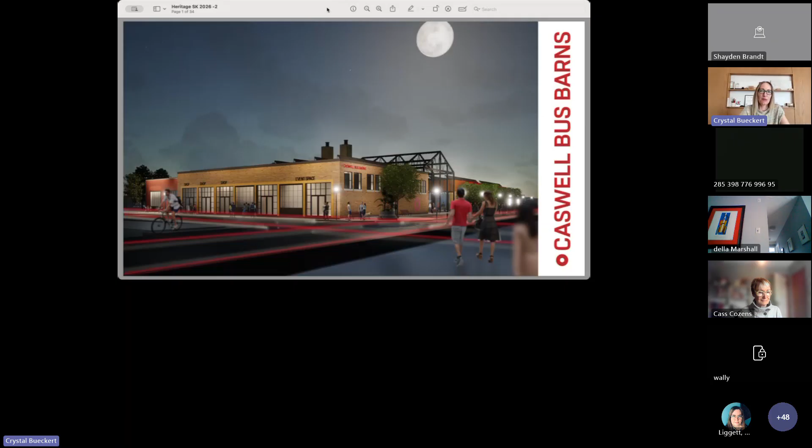So I'm going to tell you everything Krista explained and we'll go through the journey of our process. I am Crystal Bueckert of Bldg Studio Inc. I am trained as an architectural technologist and a registered interior designer, and I also have my fine arts degree from the University of Saskatchewan.

So I'm sort of an organically grown designer, I guess. And I live in the Caswell Hill neighborhood. Our office, as seen here on the screen, is also in the Caswell Hill neighborhood, actually across the street from the Bus Barns. This was one of our smaller adaptive reuse projects—our office is the old convenience store from 1923. We've redone it and it's home now.

Partway through our journey as Bldg Studio Inc., one of my employees, Kyle, and myself decided we would start developing. Our first project, we chose the hardest project in Saskatoon, the Caswell Bus Barns, to break our teeth on. We named it Prologue, because a prologue is the opening, the page before the play happens. So we feel like as developers, we're the introduction and we set the stage, and then the user can come in and write the story.

So our content today—some of the things I'm going to go over: a bit of history of the project, which is very varied; our objectives in the design-build process, as a community adaptive reuse process; the vision, and how that translated into our design principles, and then how that translated into actual construction and reality and the challenges we faced after that. And then I'm going to show you some before and after pictures of the project. It's almost done, so they're not exactly after pictures at this time.

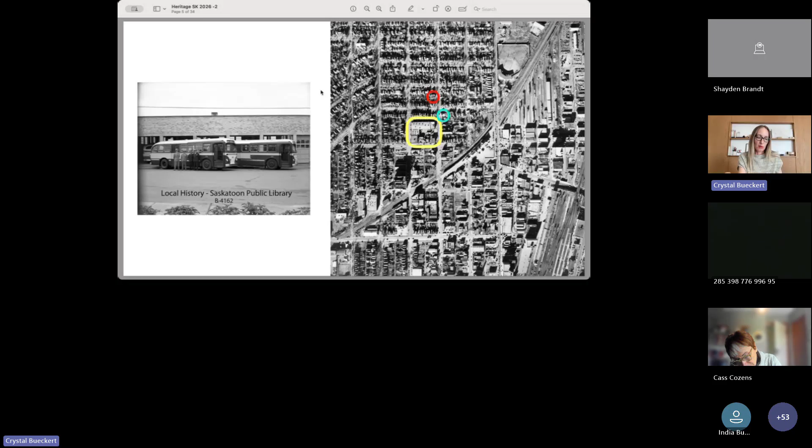So having the original drawings has been amazing. This is a drawing from the 1948 building, which they built when they got the gasoline buses - up until that, it had been streetcars in the neighborhood. So this was a major build for them. It's a beautiful building, so lovely to have these hand-drawn drawings, including the full schematics for the structure, the poured-in-place concrete, the posts and the roof. It's a very sturdy building, and it would have been an absolute shame if this thing had been knocked down.

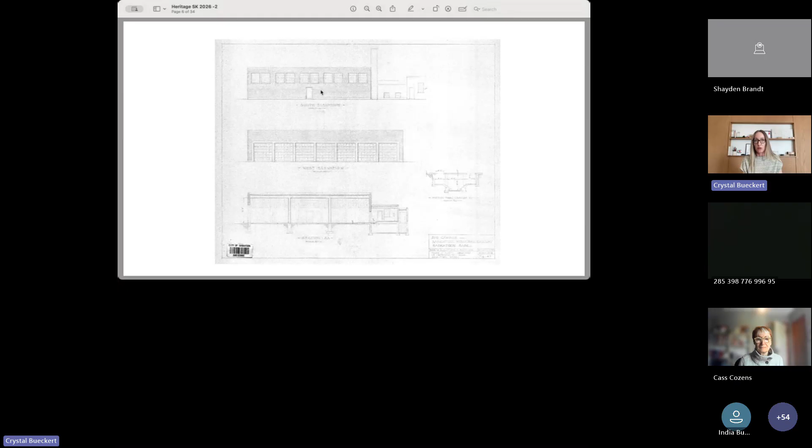Connected to it is the 1974 building. Here's the whole floor plan of the 43,000 square foot building we're dealing with. We figure it's about 5 buildings put together, with various ramps connecting the different parts due to the slope of the site. So this is kind of what we were dealing with, and what we started with when we began our drawings was actually this document. It's been really helpful to have this.

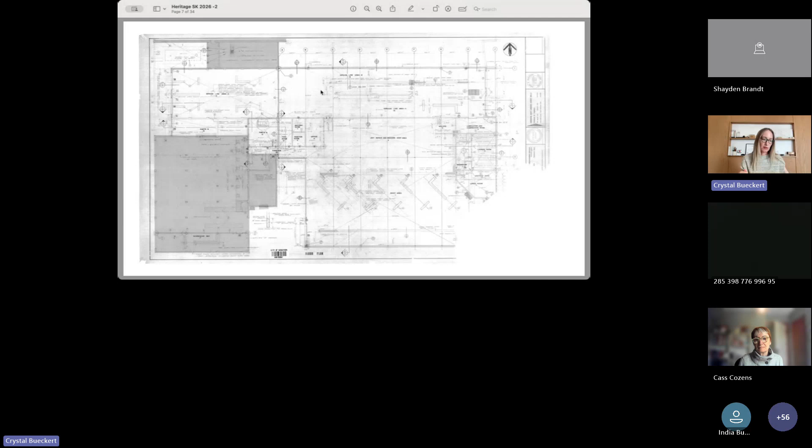The city planned to move the buses out of the neighborhood somewhere around 2009. They knew they owed the neighborhood something better because it had been so awful for so long. Living a block away, there were about 200 buses driving past my house 4 times a night, every night, as they circled around to go from one end of the garage doors to the other. So the neighborhood really took a beating on this one.

So the city knew to collaborate with the community, got the community association involved, and did a full concept plan - the South Caswell concept plan - proposing what we actually wanted in our neighborhood. We had design charrettes, everything. This was all back in 2010, so this has been a long-running project. It's really important that the community was involved and has been involved the whole time, as they've really driven this adaptive reuse and turning it into a mixed-use building that will benefit the neighborhood.

So in 2020, there were quite a few proposals, other developers who tried purchasing these buildings and having various different kinds of plans and planning. And then the last one fell through when COVID happened. So after and during that time, the city had already remediated the property because they knew they couldn't sell the building.

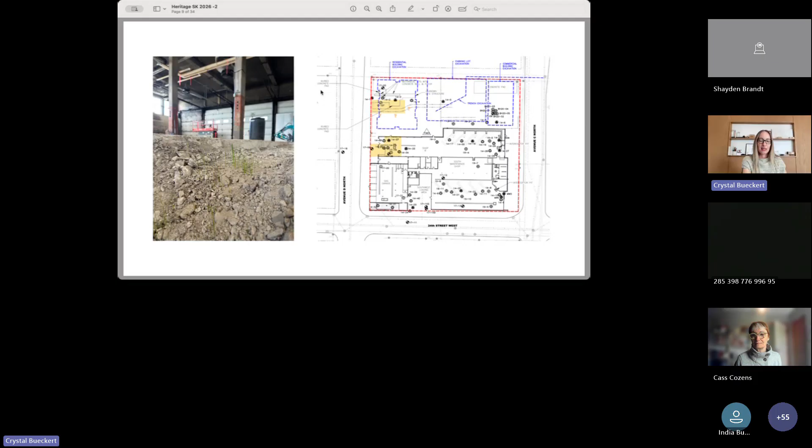So our project objectives are pretty much straight out of Jane Jacobs' book for adaptive reuse and mixed use. We wanted to revitalize the building, obviously. It's got such good bones, we needed to use it. We wanted to create diverse artistic experiences in the building, as the community had asked for an arts and culture hub. And with that, having the community engagement, making this a building that the community can be proud of and be involved with, and therefore have the economic growth.

So in rejuvenating this existing building, it's serving as an arts and culture hub, and we're breathing new life into the area and becoming a cultural anchor point for the community. It is at the southern end of the community, but it's sort of on the way to downtown, so it kind of does feel like a collecting point.

As an arts and culture hub, and knowing that artists would inhabit this building along with nonprofits and cultural organizations, we knew that artists can do anything with any building. They're often the first group in a space, in an older adaptive reuse building, who come in and make it better because they have a vision. They're so creative. They can do anything with any amount of money. And they're usually the ones that make it great and make it safe and bring that community in.

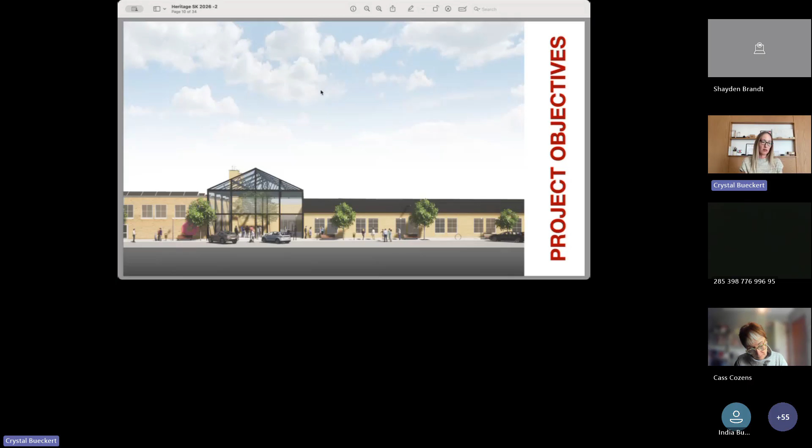So this was the main objective that the community wanted us to do, and this was part of the South Caswell concept plan back in 2009, 2010. Right off the hop, it was adaptive reuse of the buildings. They see that corner yellow brick building, the 1913 building, as the heritage site, non-designated of course, so keeping that building was very important to them. They wanted to maintain all of the other buildings as well, with structural considerations in mind. Once the structural engineer was through, all these buildings on our north portion are totally stable and very good buildings.

So this was sort of their list that came out: do commercial, do arts, do mixed use, reuse the buildings, and have it as a community center. So far as to say retail, daycare, art studios, artisans, food producers, and a market area. I'm hoping the things we're not taking care of in this list can get taken care of in the south portion when that goes for sale.

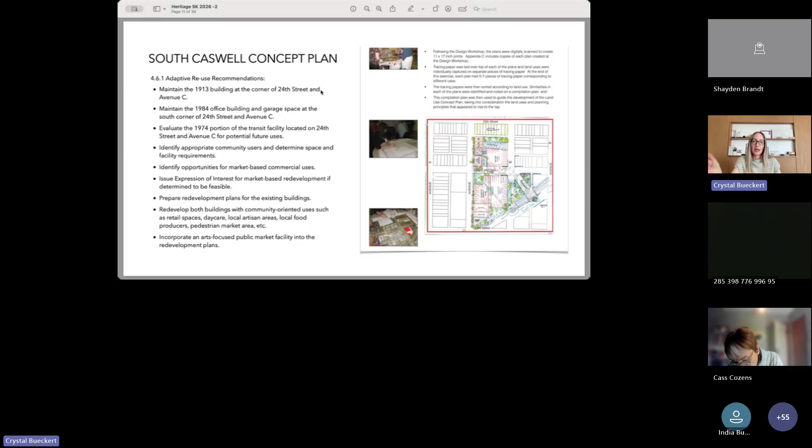Yeah, a very artistic neighborhood, and I think they really nailed it with this one. Just over on the right here is a snippet from the report, and that's me in the middle photo back in 2009 drawing a site plan for this space. It's been a passion project, and I'm really happy to be part of the group to take this forward. The community design charrette was amazing, everyone showed up, we still talk about it. I think it's just a really good mechanism to get the community involved and get all those ideas out, and this one worked - it's actually happening. Very happy to be part of that.

So those are our objectives and our history, and then we have our vision that we're going to lay on top of that. With that in mind, we know we have to deal with various artistic experiences and disciplines. We need a place for culture to happen, for community to happen, for those accidental interactions between groups where there's a synergy and the different groups can start working together. We needed to know we had to create the places for all of these things to happen, but also not being prescriptive with it.

Not building a space and being like, okay, well that's where you take your phone call, or that's over here is where you do this. So knowing that this community can take care of themselves and they can build this out how they see it happening, we're trying to be minimal on our side so that it's a grassroots and organic development. It may not be the fancy door-opening that people want to see on the first day of a project, because this thing does need to grow and develop on its own. But I think that's where the success is going to happen - in what happens in the years to come.

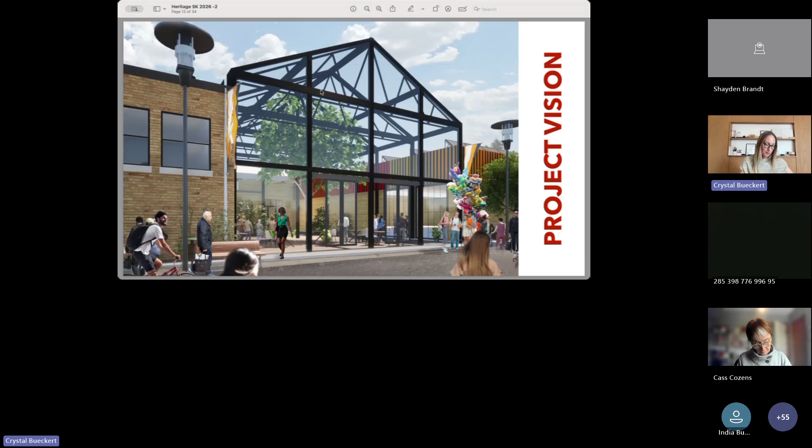So this is the site. The lower middle is the 1947 and 48 original yellow brick buildings from one of those first photos, so the community is calling this the Heritage Building. It's connected to a 1921 portion of the building, which we only found out recently - we thought it was a 1949 building, but things have revealed themselves. That's connected to the 1974 and 75 buildings, the metal structure, concrete block, very 70s building with clear span trusses. What we're doing is connecting that empty space between them with a public atrium - a very clear gathering space, and it faces south, so it's going to be very beautiful, well lit. This will be the main doors into the building, so it's going to connect the thing as a whole.

So after we're about to wrap up this building, the next parcel and phase 2 is the 2026 start of the apartment buildings, which is a 28-unit apartment building, affordable, and there's 9 barrier-free units on the main floor, which is also something that's hard to find in our neighborhood. So we're excited about that.

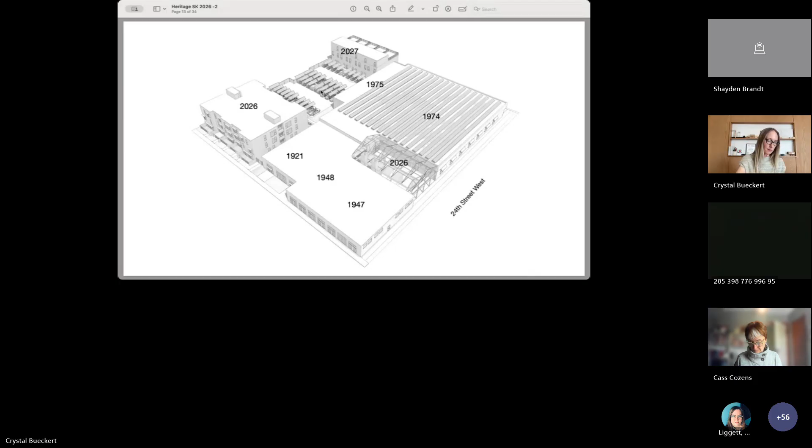It took us probably 3 years to get all the right people in the building. We had many conversations with all kinds of groups, sort of a revolving door at some points, just to make sure that we were creating good roommates and a community that we knew would work well together. So it was a lot of talking. A lot of people wanted to but couldn't. But I think we got to where we needed to get to.

So the community theater is our anchor tenant, and that is Summer Players, GTNT, Gordon Tootoosis Theater, and On the Boards coming together. And we have a printmaking studio next to that, a ceramic studio next to that, a learning center for adult learning, artist studios, sound recording studios, a gallery space, architecture office, and a retail.

Pardon me, I'm not used to talking this much. And then you can see the public atrium in the middle of the space, and that's our center focal point. So it's very important to the whole building. Again, the doors are coming in from the bottom.

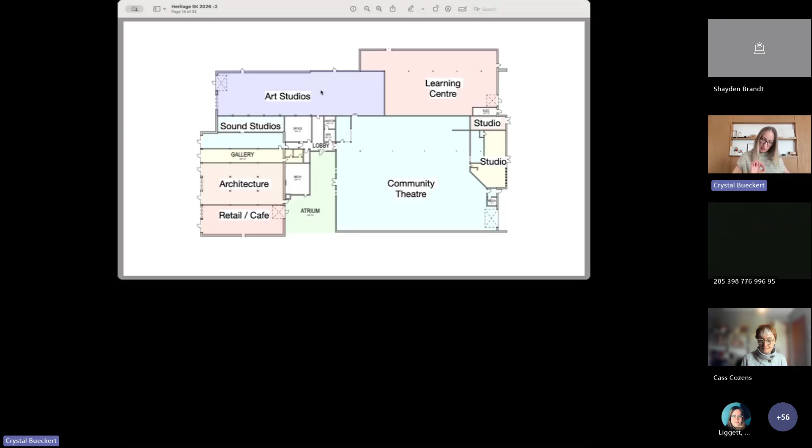So to explain this, one thing is showing a floor plan, but to explain our vision to these people who are coming into this dirty building when we first got it, we made these vision boards, and these are really important to communicate to everybody how the space is going to feel and how you can take an industrial building and adaptively reuse it into these functions.

So on the left, we have just some general vibe of the building and how the atrium can look and the overhead doors. And then on the right, we have the theater space, which has really high requirements for theater space. And so a big box is the best place to start.

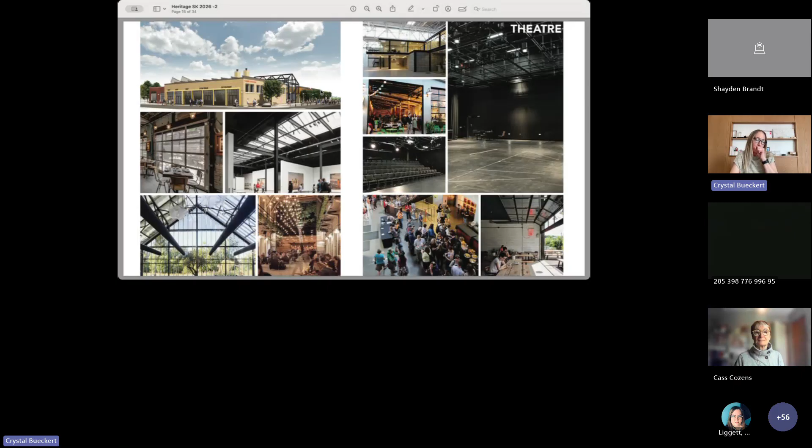The office spaces and studio spaces, again using that sort of raw space, easy for people to understand and for arts organizations to understand. And pottery, gallery—excuse me—and just using that natural light and those natural elements of the concrete and the metal structure.

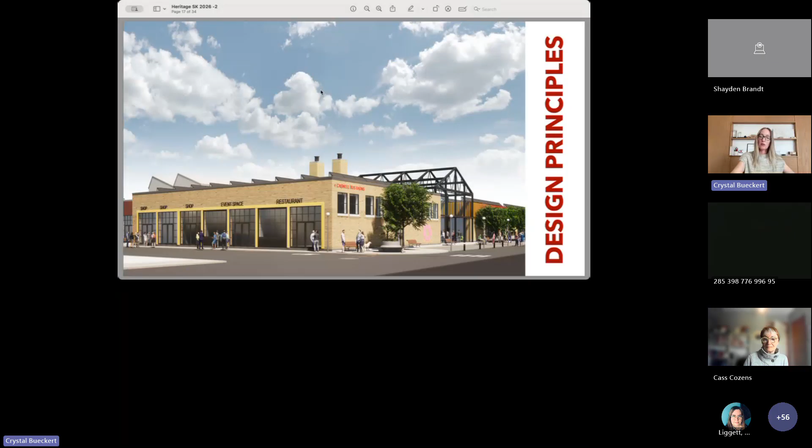Design principles. So the adaptive reuse mixed use project, we're aiming to thrive through artistic expression and community involvement and engagement. And with that, sustainability with the project and inclusivity, so that we can make this culture grow and have economic growth in our area.

So with our design principles, and you get a building like this, it's very important to use what you've got. And there's so many things in this space—the writing that people have done on the walls, the old paint colors, various signage, quite interesting. The Estevan bricks there in the middle picture with the caulking as a pointing solution. So a lot of surprises along the way.

And then on the right, just how all these old buildings were put together, and the roof leaders just running through the space, sprinklers everywhere, lots of mechanical and electrical solutions sort of done ad hoc. So dealing with these things, we knew we had to be flexible and maybe not too precious about how we were going to deal with some of these problems, and to celebrate them—celebrate the historical significance, the architectural significance of these buildings, and really showcase what they are.

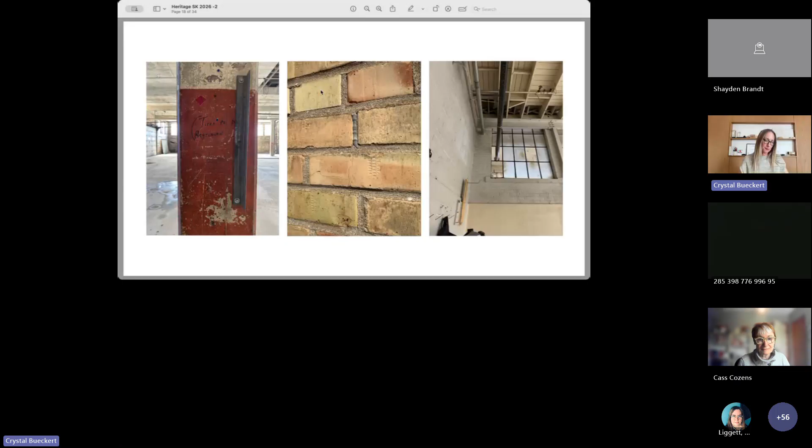So this is the difference between the 1974 and the 1948 finishes, and how we needed to sort of blend them together, but also reference each other. And then how do we add the new brick? We found a pretty good match with a Hebron brick that was very close—it just needs like 40 years of diesel fumes on it to match. So having these together and knowing we had to be flexible in all of this usage, and reusing the signage as well.

So fixing the building is one thing, and then making it look good was the next thing. So we wanted to create some simple spaces visually and not put too much into it, by incorporating the story and life of the building and telling its narrative. So we wanted to unmask the materials and not cover them up, to make reference to them and celebrate their history. That means keeping things simple at the start, and leaving room for it to grow and be flexible, and not over-prescribe what our design is going to be, so everyone can make it their own.

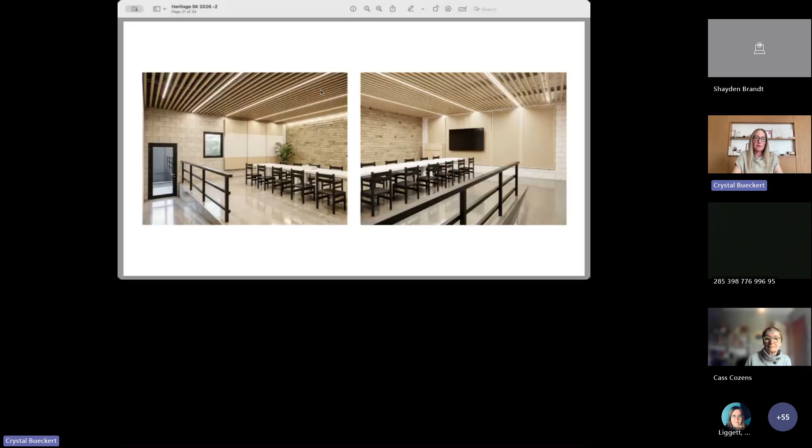This will be the community room. So we have one space available for rentals from the community. We're just polishing the floors and revealing the brick and adding some wood for warmth and something a little bit more human in the space, but a very simple reuse.

It's going to be used for meetings and workshops, etc.

We had many designs for these buildings. We knew we wanted the whole development to sort of look like a whole, but I tried red brick and different colors of the siding.

And I actually did a poll with our Instagram followers with all the various materials that could be possible for these buildings. And the community basically unanimously spoke that they wanted it to stay the same as the original buildings and to create that heritage feeling. So they chose these two.

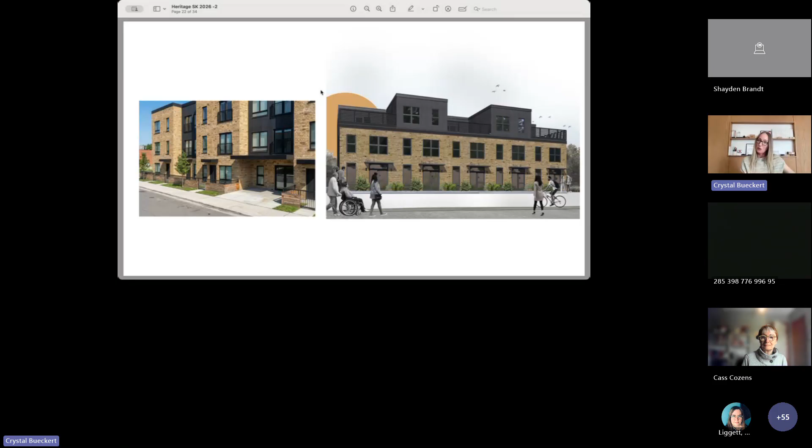So next came construction. All our visioning is done. We have our stakeholders, we have our buyers, we know what the uses are going to be. And now the dirty work begins.

And we joked that this is the easy part because we know how to build. The previous years were sort of a steep learning curve. So we started demolition in October of 2024, and we're just now handing it over to the new buyers. So I think just over a year.

We decided to do minimal drawings for the building because it's nearly impossible to detail everything in here and how to solve every problem. We had an understanding with our contractor that we're going to solve these issues on site, and we're going to be creative and flexible and available to make those decisions.

So there were decisions every day, going to site every day. Look what I found. All kinds of things to consider with our budget and our timeline, but we are basically on budget and on time. So I think we did pretty good with that process.

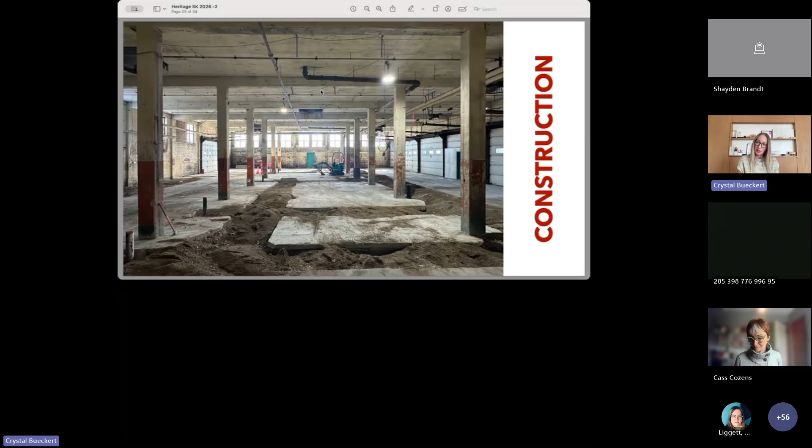We did a design build version with our preferred contractor, Patrick Schwinghammer, seen here on a glorious day. Working closely with him, we've done that before, and we know how to communicate with one another and how to solve these problems together.

And we have decided that this project is the opus for both of us. It's the biggest thing I think either one of us will do, and I believe he's retiring to Italy after this one.

So having him on board and being able to make those quick decisions, also being able to make quick decisions in our office, because we're doing the drawings in office, the design in office, the pro forma and business plan in office. So we could really pivot very quickly, like in 5 minutes we could go in a whole new direction. That flexibility is really important for schedule.

So some site challenges. On the left is the mechanical room. We inherited a really good boiler system for the building. So it was all fan coil, very efficient, checked weekly, logged weekly, and maintained really well.

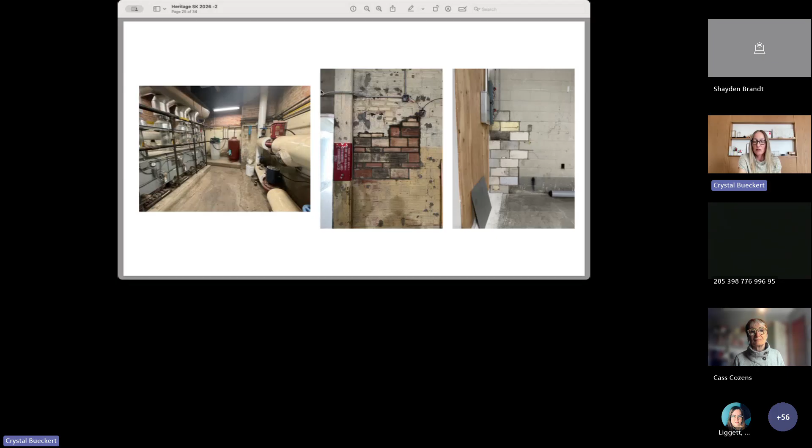So dealing with surprises, like how do we fill the clay brick wall? Go find some older clay brick and infill it, and we'll fix it later. However, I don't want to paint over this because I think it's actually a neat quilt patchwork of the side of the building. And the same thing with the blocks.

So a lot of surprises along the way. The 1912 building was actually timber, post and beam, and then attached to this concrete building. So dealing with those things and then kind of celebrating them too, we've decided to turn this into an art mural wall.

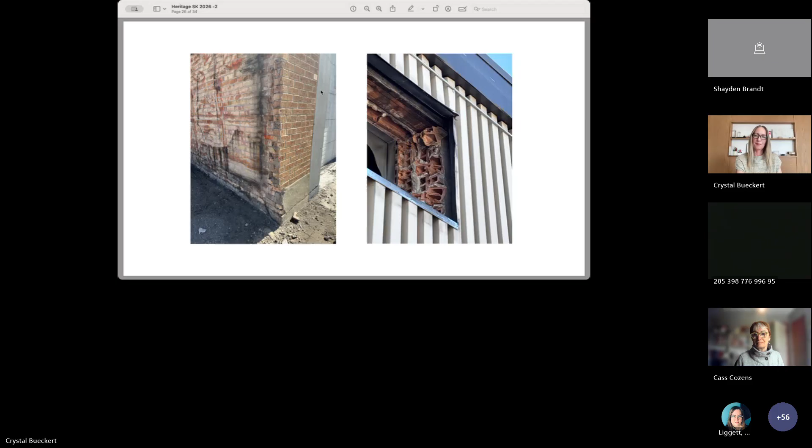So a bit of a change to the streetscape for our neighborhood, going from something that was a nuisance to then very quiet for a long time while it sat vacant, to now being ready to turn into something lively again.

On the left there, we actually matched the brick because it was just concrete block behind that metal siding, and there will be an art billboard above that.

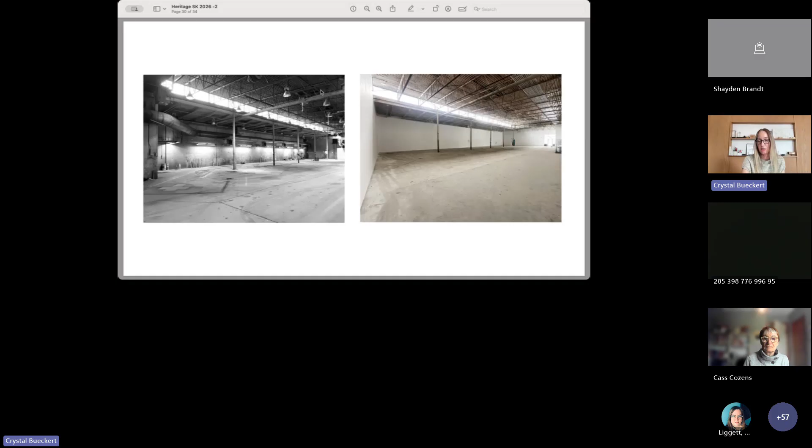And then we've replaced everything inside and pressure washed, cleaned it. The joke was 1,000 monkeys for 1,000 days pressure cleaning this building. This was the most significant clean—this is the nicest corner of the building, of the heritage portion.

And they used it as the wash bay, so it was really disgusting. That is all just diesel stuck to every surface. So it required a lot of cleaning, and we got it clean, and maybe with a little paint we can clean it up a little bit more.

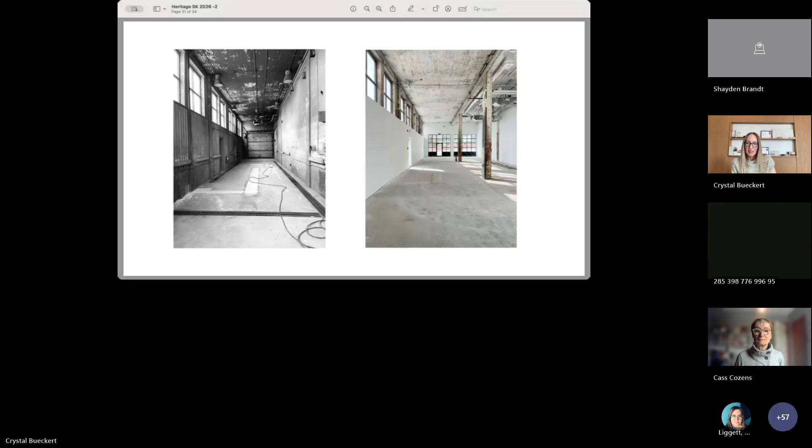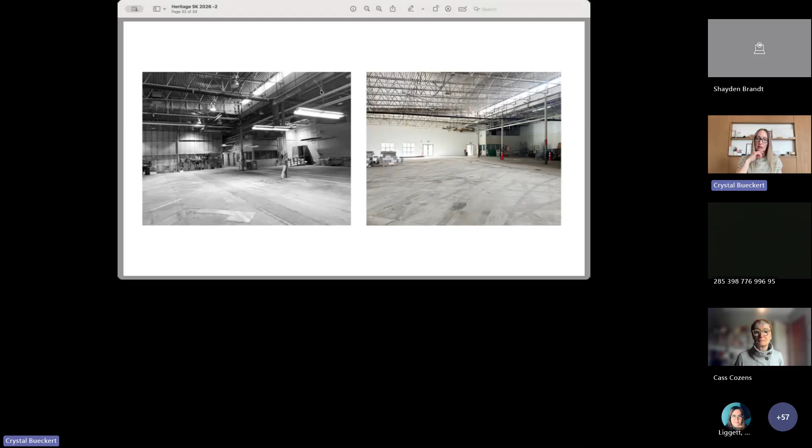And then some parts of the building are unrecognizable. We actually took some exterior walls completely down and rebuilt them and added glazing. And again, the ceiling was black with diesel, and the pressure washing revealed the original sort of ivory beige paint. This is the interior space where the buses could turn around.

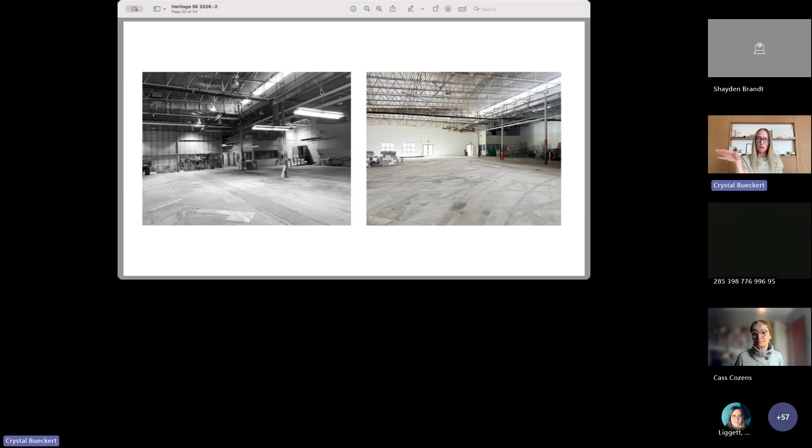So really great for the theater that's moving into here. There's no posts in the way.

And then lastly, this is our first tenant who moved in. The first buyer is the printmaking studio, Jill Ross Studios. And they fixed up their unit quickly after we handed them the shell. They've been operating in there since January.

So it's nice to start seeing that life come in, and it's nice to know that we have these groups of people who are really going to take care of this building and take care of this community.